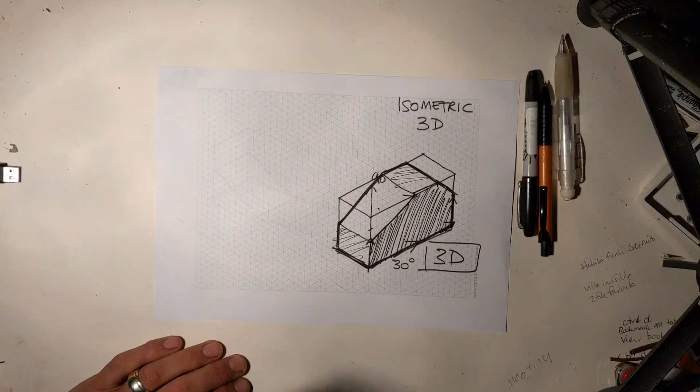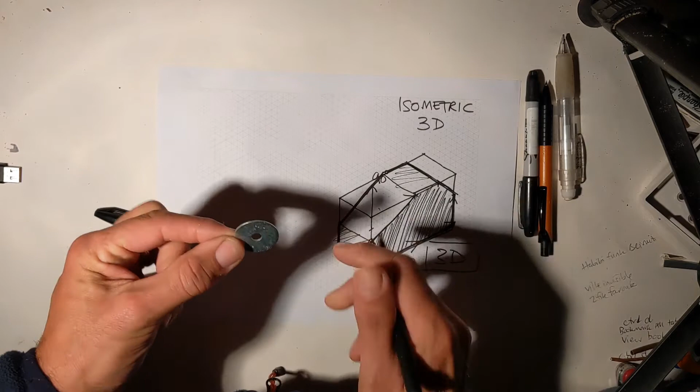Okay, so I've got a car body, but my car body obviously needs wheels. So I'm going to try and draw circles. Now, circles drawn in isometric is really quite tricky, right? A circle viewed straight on obviously looks something like that. But look, can you imagine what happens if you start to twist it a little bit? I can't see that straight out. It creates a shape which is called an ellipse.

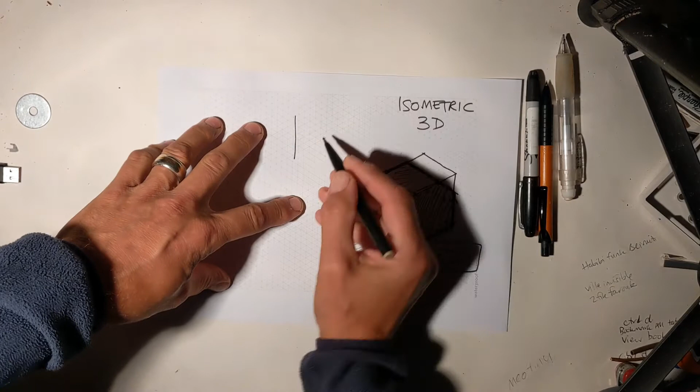An ellipse, right? So the trick is drawing an ellipse in isometric, and you've got to understand a few things, right? So let's see how I start. If I drew a circle like this, right? Now a circle will fit in a square perfectly, like this. And the square will cut the circle into quarters, and the circle hits the square like that. All right, you understand that.

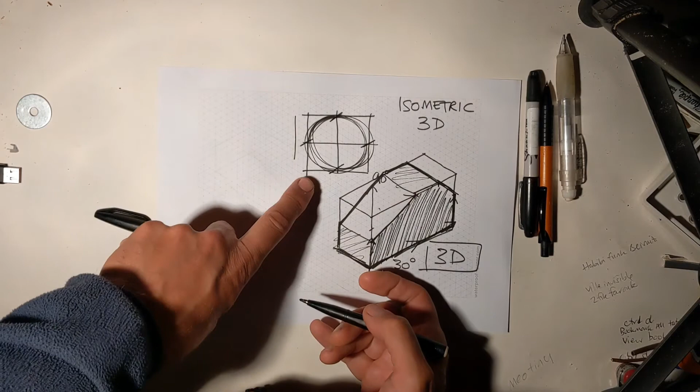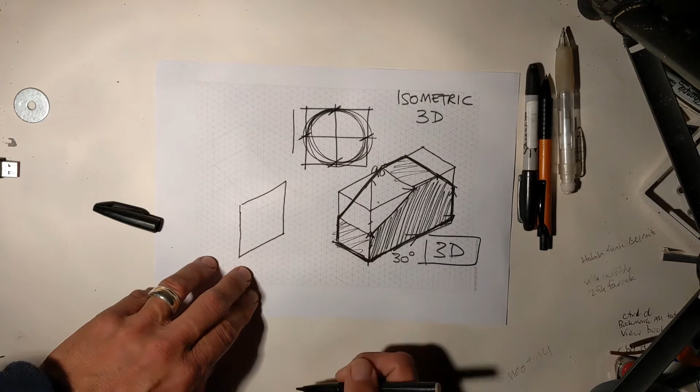So imagine now what happens if I draw that square in isometric, right? So I'm going to count squares: 1, 2, 3, 4, 5, 6, 7, 8. 1, 2, 3, 4, 5, 6, 7, 8. I think that's square, right? So hang on, just double check. 1, 2, 3, 4, 5, 6, 7, 8. One more. Okay, so that is my isometric square, right? Now I'm going to divide that into 4 like that.

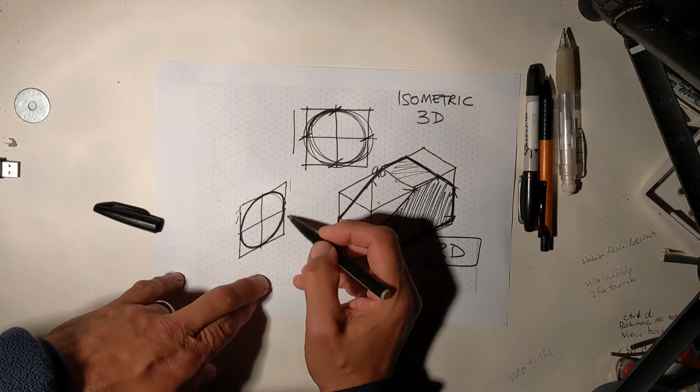Now, because my circle fitted into a square like that, my isometric ellipse is going to fit into a parallelogram. And all you need to do is squash the circle. So you practice, look, squashing that bit, squashing that bit, and then kind of stretching this bit. And what that does, it draws for me the ellipse. Can you see my ellipse there? So that shape is my ellipse. Now it would probably be better if my construction lines there were a little bit lighter.

Right, now the trick when you do these ellipses is to use the ellipse as what's called an underlay. Now I think I showed you underlay before, right? So on an underlay, you can put it on top of your drawing and you can trace off the shape that you just created like this, like that.

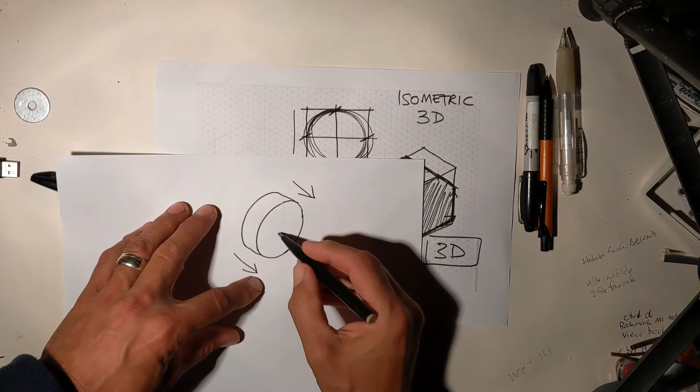Right, now if you want to draw something like a wheel on your car, here's a clever thing, right? If you move that way, you can draw another one of those by tracing that. Look, again, blend in the corners, and you've got a ready-made wheel. You need a centre for the wheel obviously as well, but that now is ready to go onto your car.

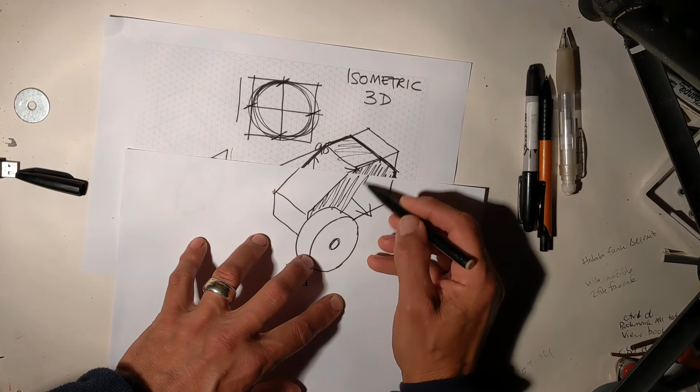So if I've got my car here, look, I can start thinking about tracing that as well. There's the body of my car, look. And now my car has got a wheel on it. All right, so you can build up your shapes using ellipses now, right? So just have a go. It's not easy, but it's something you practice and you'll probably get a lot better at.

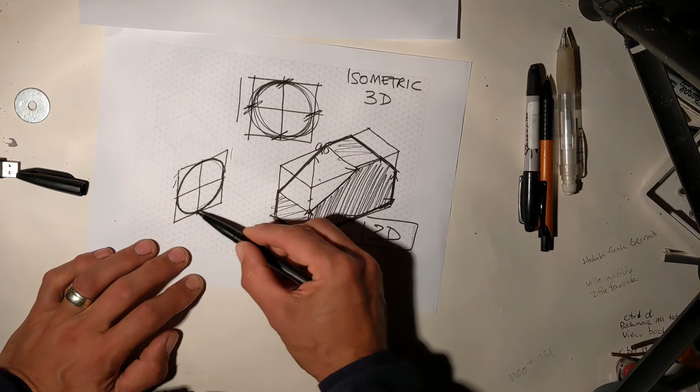So start by drawing a circle, draw a square around the circle, divide it into 4, make marks where the circle intersects or meets the square, draw your isometric square, make sure it's the same length as it is height, and then practice squeezing your circle to fit into that parallelogram. So that will create your E-L-L-I-P-S-E, your ellipse. Okay, so that's what we call circles in isometric. Give it a go, see how you get on.